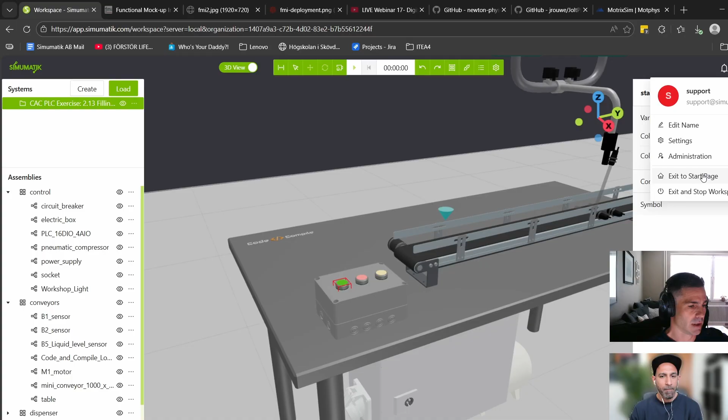We're gonna start talking about what has happened and what we have been working with. I wanted to bring the last four releases we have done. As most of you probably know, we have an announcement in the app every time we have a new release. I'm gonna share my screen, and if I go back to the start page, usually up here we have the releases, what's going on, or what we have released each time. So I wanted to talk about all the last four releases.

First one is release 13, where we improved a little bit the interaction modes. Actually, there is something ongoing that I didn't mention in the bullets, but the idea is to provide three different interaction modes, both when you are editing the system or when you are playing it.

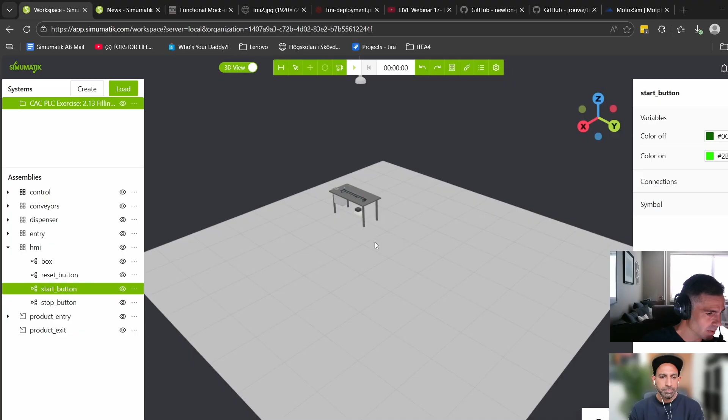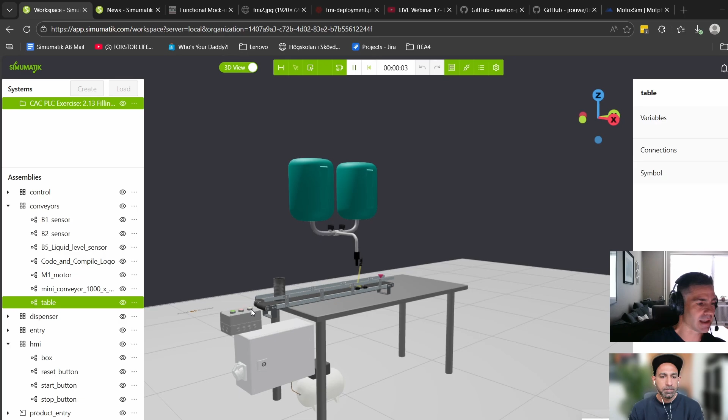So what does it mean? If I jump into the workspace again, we all know that when you are in the workspace, we could before select items and then move them or rotate them. So we had these three interaction modes, but we wanted to add the possibility that we didn't have before, to even select items while we are simulating.

The default interaction mode while simulating was what we call the user action. So for example, when you click on a button, you see that it goes inside - that's a user action. Or when you click on the box, you can open it or close it. The problem was that sometimes, while simulating, you just wanted to check a connection or a variable with one component, and you couldn't do that - you had to go to the left tree, find the component, select it, and get that.

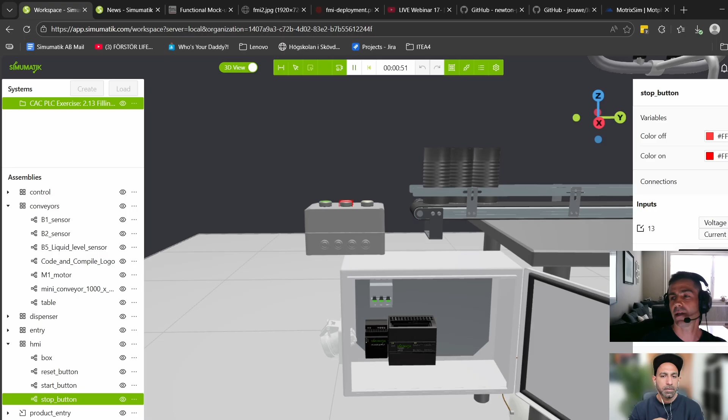So now you can switch between the user action mode and select mode, and now you can select any component, and then here you have the connection - you can see the values and all this stuff. And as you see here, there is room for a third one.

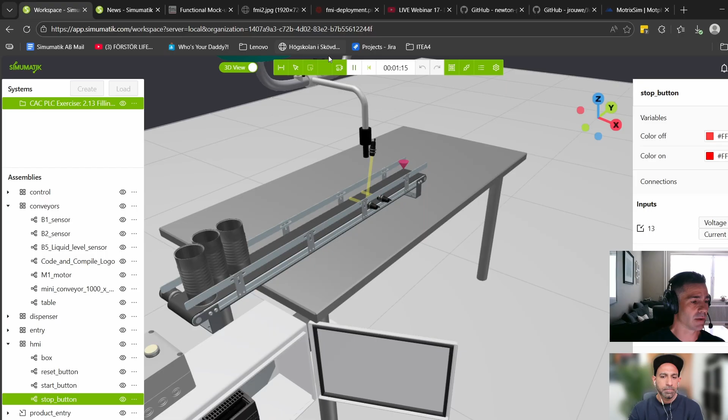The idea with this third one is to introduce the feature we have had in VR mode, which is grabbing products - to allow with the grabbing mode to click on one object and be able to move it or push it, so you can interact a little bit, maybe switch positions, remove something from the system.

So you can maybe force some false situation, an error, whatever. And it's only for the components that are moving - you can't move the conveyor like this, because it's gonna be using the physics.

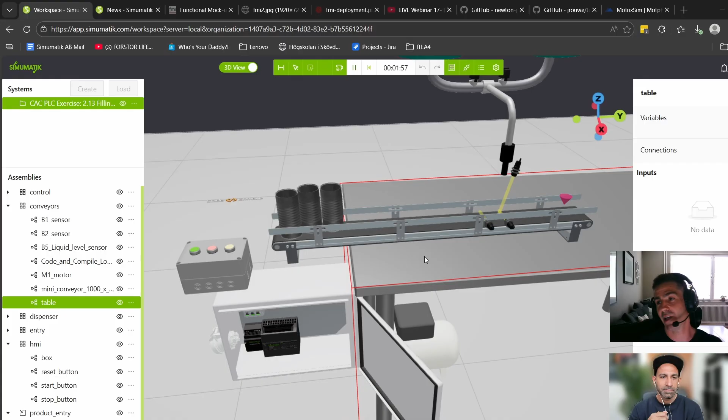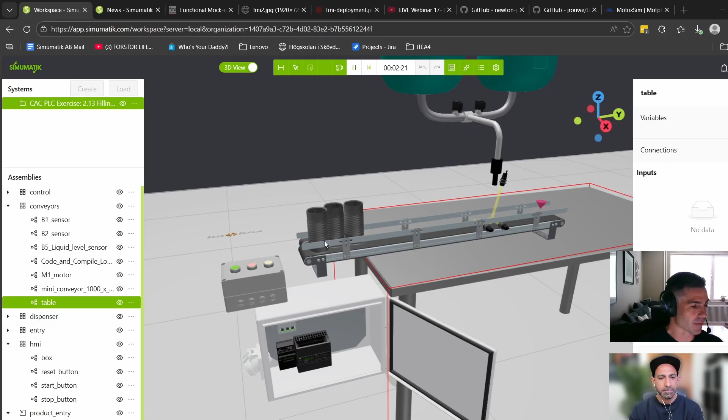Of course, you will be able to select and try to grab something, but static elements won't be able to move. On the other hand, if you have a robotic arm, you will be able to grab one of the axes and try to force the position, but you'll be fighting with the controller because it's probably trying to set one angle in each of the axes, and it gets kind of confusing. But yeah, that's one of the features we add.

If we go back to the presentation, the next one was that we removed the individual subscriptions, and this was kind of a strategic decision from Virtualware. We want to focus on educational organizations or industrial companies, engineering companies, and so on.

But we have a solution for those individuals that still want to learn more about automation. They are interested in virtual commissioning, they want to learn robotics, PLC programming, or whatever. What we have done is open up to partnerships, for example with Code and Compile, so we have partners that can offer these individuals a possibility to get access to Simumatik through their organization and their content.

I think you have had several people that we sent to you, about 20, 25 people who are individually subscribed. And if somebody wants to know more about that, you can go to my website and find the way to buy directly on the website an individual subscription. I also have 2 courses which are given for free.

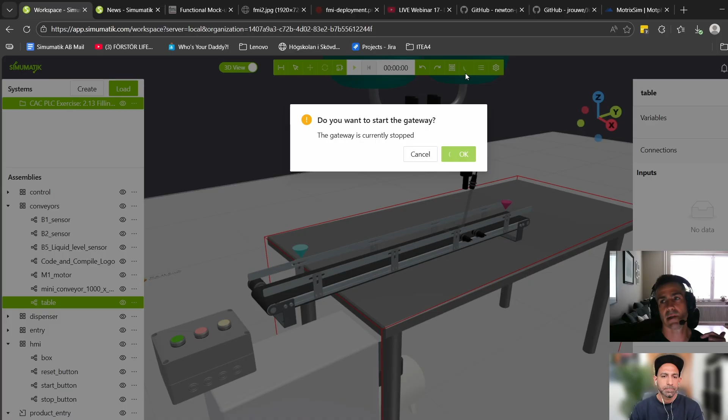As default, you will have the normal setup. As we all know, the gateway can be started from here. This button will connect to contact the launcher, which will have the latest gateway download, and it gets connected. Once it is started, you can just connect and disconnect very easily.

But if you want to use the built-in gateway, you can go to the settings, and here you can click on this button. Sorry, now I need to move myself from the screen. You can hide us for a second.

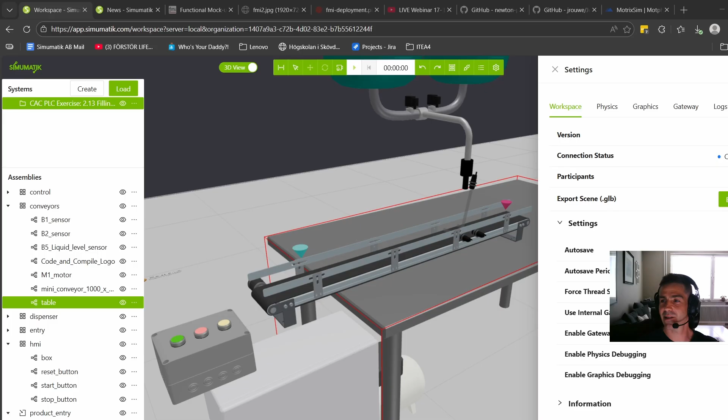So here in the settings, and actually I don't see it. I don't know why I don't see mine. Make it full screen or something. Yeah, I think it's full screen for some reason. I don't see, but it's this one.

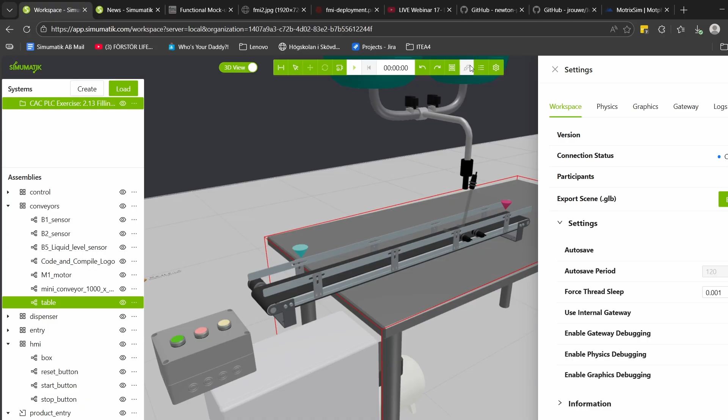So use internal gateway, there is a checkbox. Probably now we can see it. Yeah, this checkbox. So if we activate that checkbox, then this button is disabled, and now automatically, when we click on play, it will start the gateway. So that's kind of a difference. Before we could run the model without the gateway being active, but when you use the built-in gateway, it's going to start as soon as you click play.

So it kind of simplifies things as well. In many cases, maybe you want to have it as default using the internal gateway, and actually when you activate this feature and you save the system, it's going to be saved as part of the system preferences. So next time you open that system, this checkbox is going to be checked, and you will have just the internal gateway selected.

So what do you recommend? In which situation should one use the internal gateway, and in which situation should one use the external gateway? Usually for most users, probably using the external is enough and gives you more control about when the gateway is started and when it's not. You will have better performance probably because you don't need the gateway always running while you are editing and so on.

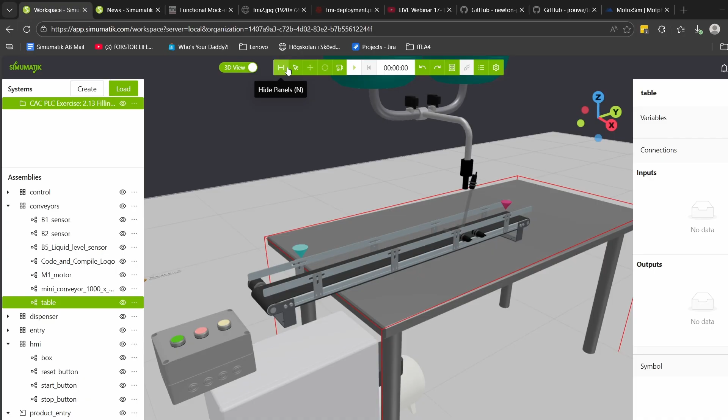Okay. So that was kind of a big deal for some of the customers, and that was release 15 last year. And the last one, which was around Christmas, is the catalogs. Maybe we can spend some more time on this topic, because I think this may open possibilities for some of our customers, but even more for partners, to become part of the Simumatik ecosystem.

You know that from the beginning we wanted to make something that is not just a platform, that's why it's cloud-based and so on. It's not just a software to create digital twins or emulation models. We wanted to be able to share content, to create a community, and the catalogs could be something that helps create this ecosystem.

Basically, as I say, you can publish content in Simumatik. People have been able to do that since the beginning. Basically, when you create a component or a system, you can go to the component or system editor and select that you want to share it, and this will create an instant copy of that component or system and share it with anyone that has access to Simumatik. That was a nice way to share content and so on.

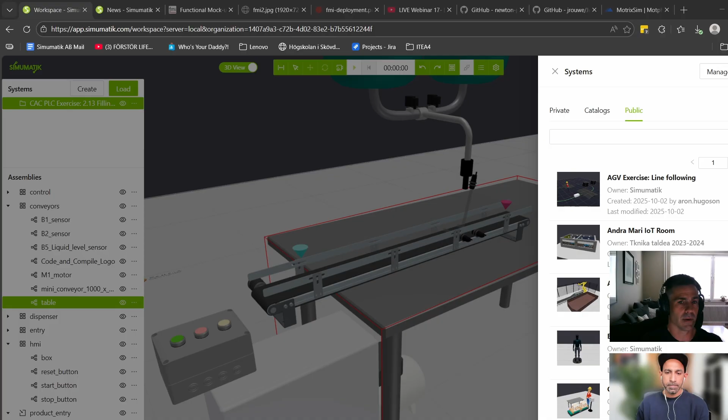So every customer or user has its own private systems and components, but there is this way to share publicly systems and components. But this public publishing mechanism, it was kind of too open for many people we were discussing, because maybe you want to try to monetize or share some content with specific users or organizations. And I believe that is a really good idea.

It's done, for example, by Unity. They have this marketplace where you can buy plugins, content, and so on. The catalogs are kind of a similar mechanism. Basically, what we are offering now is that when you publish some content, you can decide to publish it within a catalog that your organization owns.

And then you can decide who has access to this catalog. So far, this is done through communication with us, so we can activate new catalogs for our existing customers, and then they can tell us, I want you to give access to my catalog to this organization and so on. This is because we just started — we want to see the interest behind this mechanism, how many customers and partners are interested in that.

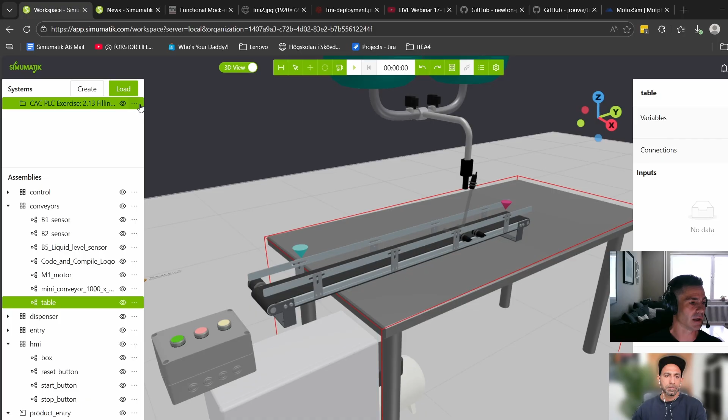Right now, I think I'm in an organization that doesn't have access to catalogs, and that's why we cannot see anything. But let me see if I go out and check. Let me see. I think we have some catalogs created by ourselves here.

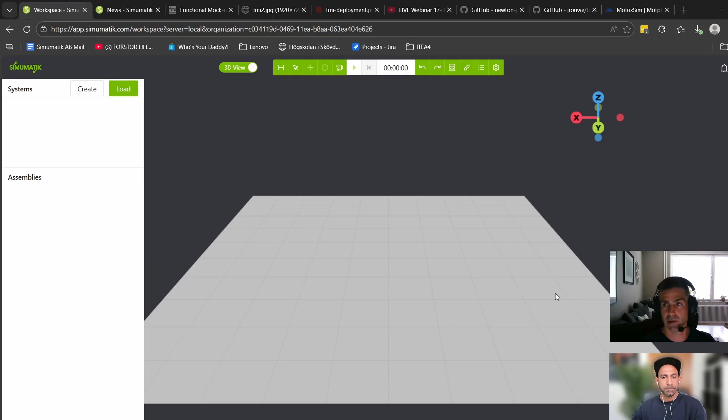Probably the catalog has systems and components both. Actually, you cannot publish — it's like when you publish a system, you need to make sure that all the components in that system are published. Otherwise, someone will try to open that system and won't have access to the components. So basically with the catalogs it's the same: in order to publish a system within a catalog, you need to make sure that all the components inside are already published or included in that catalog.

So let's see — I think here we have some catalogs that have been created, and you can see how in this case we have access to this catalog. How this is going to be handled, and how users will see which catalogs they have access to and so on, I think is here.

So, and how did you give the access? How did you add this? You contact us — so far, you will need to contact us. Okay, so right now it's in the backend. If an organization wants to start creating a catalog, because this is just the start of this new feature, we want them to contact us. We will support them on how to introduce components in the catalog.

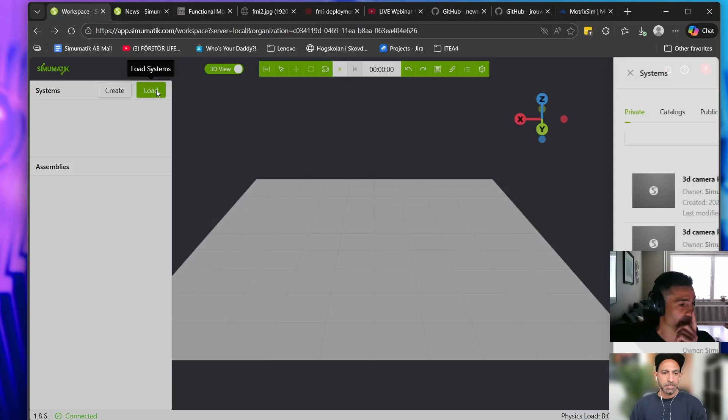Okay, so what's going on, what is the team working on? Right now they are working pretty hard improving the 2D view, the drawings view in the workspace. So what was that? Let's see if I can open another system like before.

I think most users will know that we can see the systems in 3D, but we can also see them in 2D. This is a feature that we added to somehow make connections or the process of connecting things easier, more natural, but also be able to have a more pedagogic view of the systems and components in education, because in many cases when you are building simpler systems you want the students to connect things or build their systems and understand diagrams and things like that.

So we decided to go with 2D diagrams, but the library for the 2D symbolic diagram tool wasn't giving us very good results. We have some features to create pivots and things like that, but not super natural and efficient, and sometimes a bit buggy. So the team has rewritten the entire code.

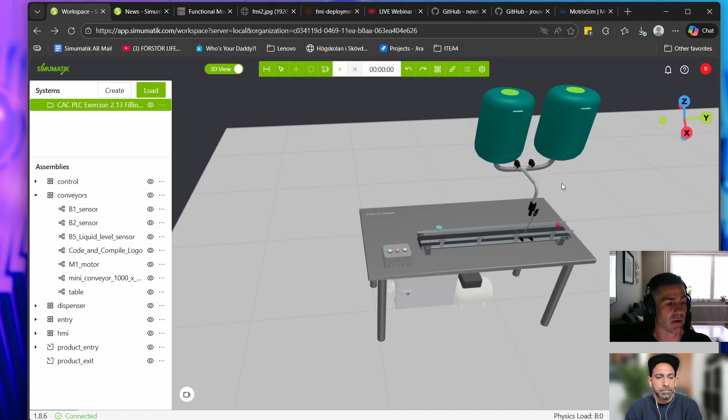So basically, we hope we will give a new boost to this feature in Simumatik, and hopefully it's gonna be way more useful for the users. We know that there are many users that actually like that feature, but they saw it as a bit limited and buggy. So hopefully we solve all these issues, and it's gonna give it a boost. So that was one thing.

I think the next thing I already mentioned is the catalog marketplace. Again, it's more an idea now, and we are gonna keep talking about that in the future. We just need more customers or partners to be interested in this feature, start creating some catalogs, see how this feature works, see how people react, see which opportunities are opening, and when we see a certain volume, we will go ahead and create this marketplace, so we make it easier, both creating catalogs and also getting the catalogs for the end users.

And see how we can make it possible, maybe monetizing these things. Maybe we can also do, I'm not sure, because you have some credits, they can buy some catalog with credits. So we need to see how we can do that. But I think after talking about the catalogs, people understand what the catalog marketplace could look like.

And then there are 3 big things we will be working on this year. These 2 are quite advanced now. So the first one is the co-simulator, and this is something that we have kind of identified in some of our industrial customers, that sometimes it's not just about 3D physics and creating machines and so on. There is logic that is needed to emulate part of the system and kind of make the PLC or robot controller believe it's controlling the real thing.

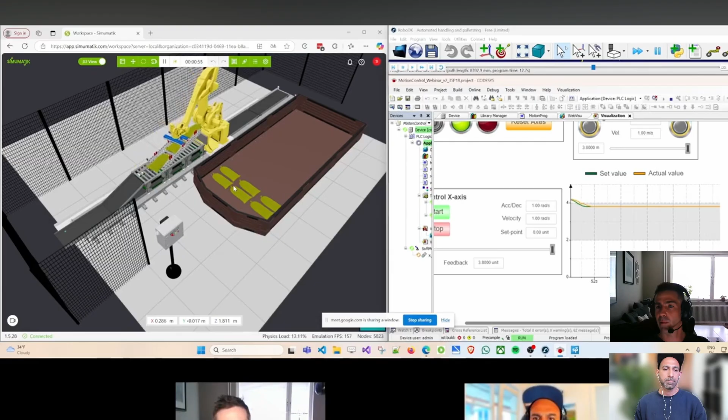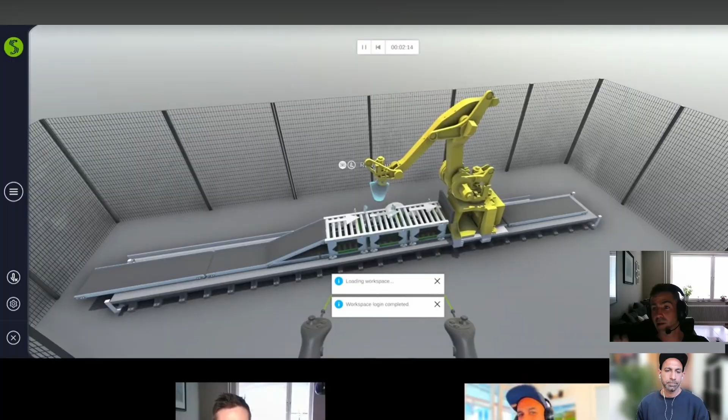I'm gonna share the screen and show this video where we were showing Simumatik and PLC, and then suddenly you open this viewer, the VR app, and you could see everything rendered with Unity. You see the rendering is nicer, performance is probably better because it's using OpenGL instead of WebGL, but not many options here.

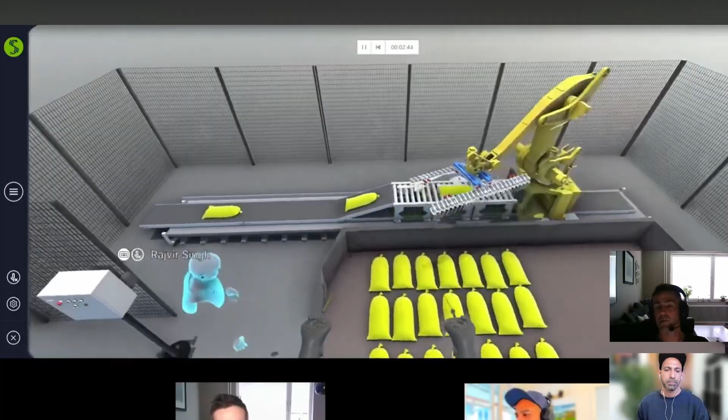So what we're working on now is just a version of this app that we call the local viewer, which can be launched directly from the web app. It will have just a few features to allow the user to open a system, close the system, and play, pause, and reset. So you could just play around with your PLC code without needing the powerful web editor with lots of features, and instead use this locally installed Unity-based application.

And if I need to change a parameter, let's say the IP address of the PLC or the IOs, then I need to go to the edit mode?

Yes, that's the thing. We will start with just very few features because we don't want to complicate this local viewer. The goal is to have a place where you can use your keyboard and mouse, like in this example, to navigate and test your system, and also be able to select if you want to go into VR mode and interact. We'll have those options, but adding a right panel where you can change parameters would be too much right now - we want to first see how people start using this local viewer, and whether we actually need to introduce more features.

We don't want to have two editors. So that is the local viewer, and it's under testing now. Hopefully in some weeks we can present it.

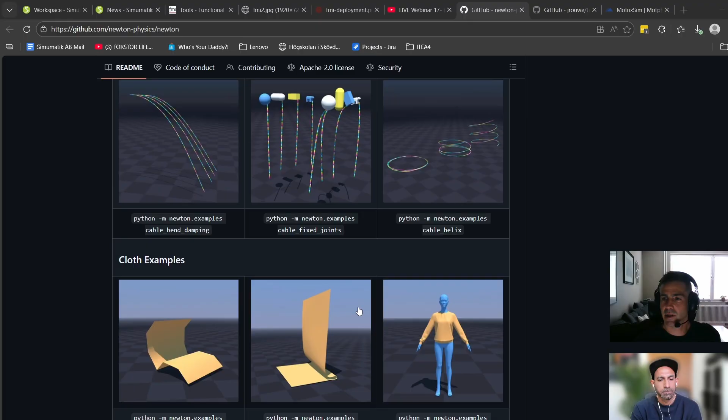That looks very promising, very interesting. Then we have another one in this physics engine.

Maybe not as promising, because Jolt is coming from video games. It's also interesting, open source, and the performance seems to be really, really good. What we're concerned about is mainly accuracy, so we'll probably need to do more tests. But what we can confirm is that this physics engine, Jolt Physics, has all the features we need - all kinds of shapes, all kinds of joints, simulating conveyors, different kinds of axes and motors.

So can the user select which physics engine they want to work with in the beginning?

The idea is that everything has been tuned to use Bullet, so probably if you select another physics engine, you'll need to tune masses or frictions or whatever. It may happen because the implementation is different, so just switching engines won't give you the same results and you may need to tune components. But if we end up implementing a new engine and the results are better, we'll probably provide that as the default engine, so people creating new components are already testing them against the new engine.